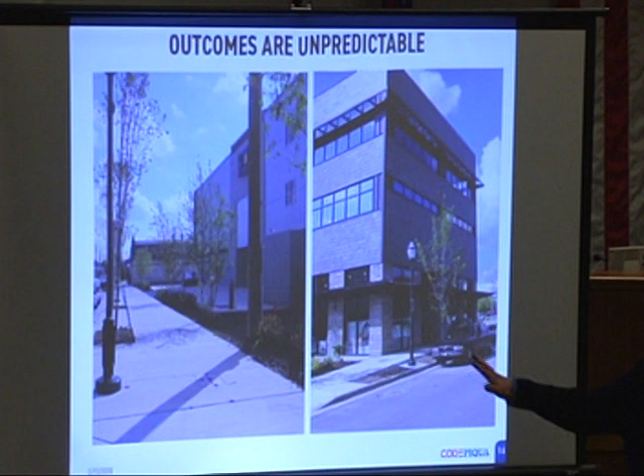If I was the guy who ran this, I'm not sure I'd be thrilled to have public storage as my next door neighbor. Now, admittedly, it's a pretty good looking public storage building, but the predictability of the system about use, also about quality of development, about the relationship of the person on the street to the building, all of those need to kind of get squared away and be consistent for people to feel comfortable and feel like you've got a great environment. So this new approach to zoning is, no matter what, much more visual.

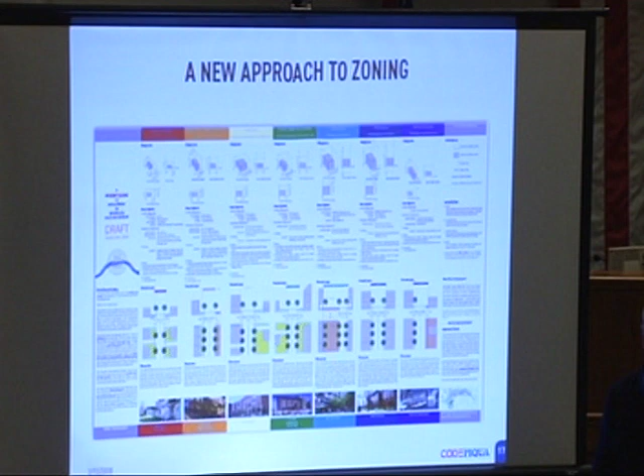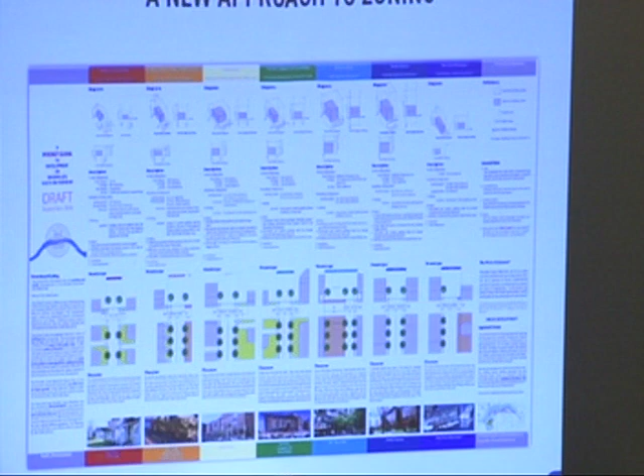This is some work from Knoxville. We are talking about combining ideas for the building on the private property and ideas for the street itself. And here we'll be bringing together the zoning and the subdivision regulations so we can talk about those things in tandem, the land use and the transportation.

This is an example of an old code. It's been a little bit updated with this little pasted in graphic that was built on the internet. But typically these codes now are visually oriented and graphic. This is one of our codes as an example from one of our client communities with an illustration of what the area might look like with lot standards, building placement standards, and height regulations, providing a much easier way to understand what the rules produce.

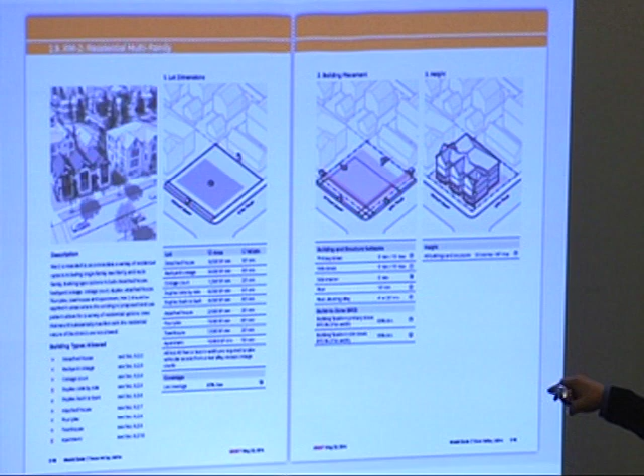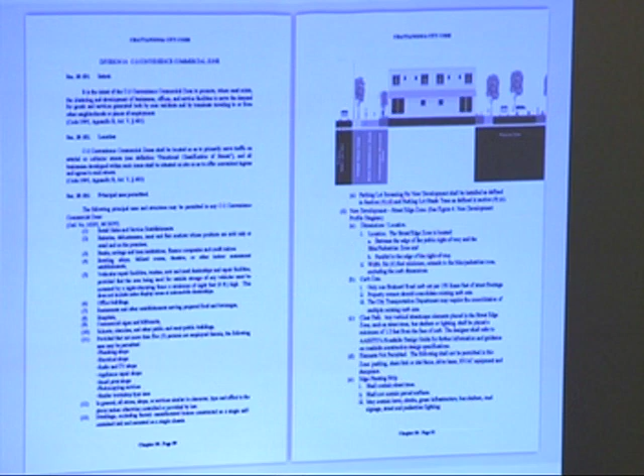The tables have the rules, but many people can't read those tables and imagine what that might be. So giving them this kind of a visual code. The other thing is when you write for the attorneys, as probably this code was originally written by the legal profession for the legal profession, then that's the kind of conversation you get instead of the design conversation that you wanted to have that happens when you have a visually oriented code.

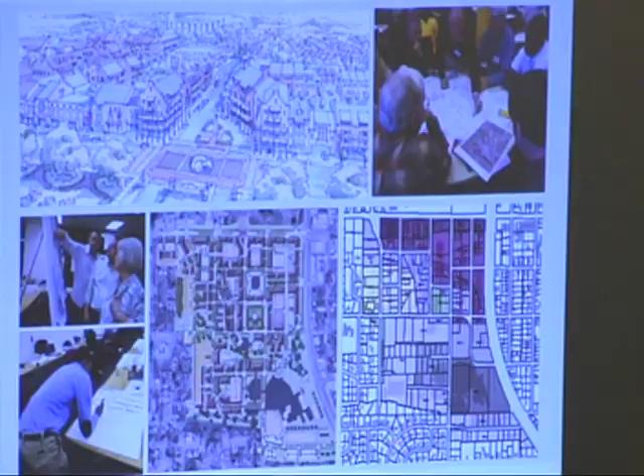Most times, these kinds of new codes focus on planning, and by that, I mean on plan implementation, taking ideas about parks, about other kinds of spaces, taking conversations with the community and turning those into regulatory approaches. That's what we're seeing in many of these newer kinds of codes. There is also a focus on this public realm concept.

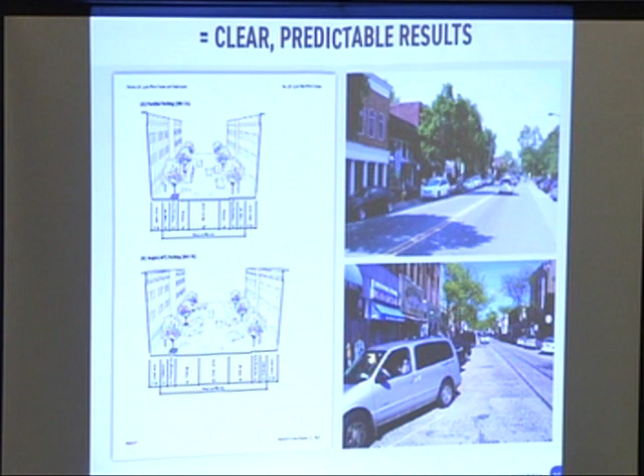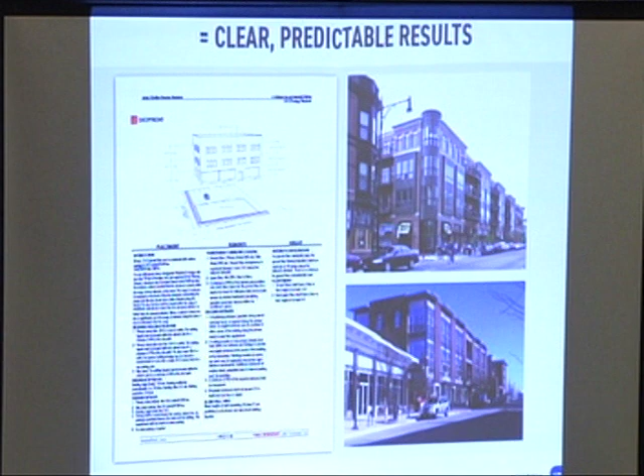The end result of all of this conversation is, if you can help us describe the thing we want, if this picture is representative of what I want, then the picture on the left is how I regulate that thing, so we all know what our outcomes will be. Clear, predictable results. Whether you like these buildings or their architecture or not, you can describe something and code for it. That's really what this project is about: the community helping us describe what they'd like to see in the future, and us helping you code for it.

So, just a little bit about our next steps. The next big step is something we call our Charrette Week. We'll be here with our full team, 6 or 8 of us, in addition to local staff. We might even get people from the Regional Planning Commission to come help support us. It's a multi-day collaborative design and planning workshop, one of the most efficient ways to get input from stakeholders without burning them out with meeting after meeting after meeting.

So this upcoming one might look a little like this. We'll show up Sunday night and begin taking our new team members on a tour through the community. We'll meet with the technical committee of city staff to check in one last time, and we'll run an open house workshop exercise on Monday night.

We'll get some new ideas, bring some ideas to the table, and combine as a group to see what needs to be changed about our thinking, what needs further investigation, more design, or more illustration, and have that conversation. The team will work over the next couple of days through Thursday late afternoon to design things and fill out the strategy for what we're going to do. In the meantime, like the last couple of days, we'll also touch base with our stakeholders again on a parallel track.

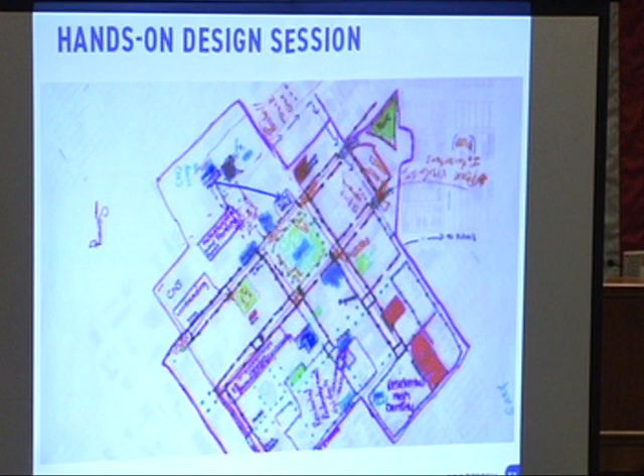The hands-on session is normally a citizen exercise at facilitated tables, with a member of our team facilitating the conversation. The conversations are often wide-ranging and may differ vastly from table to table, but that's all right - that has to do with the personalities involved and their own interests in the community. The most important thing is we get back a lot of information about the community, and especially when we do the report back at the end, we see, and the community sees, where we're in alignment. It almost doesn't matter who we've had at the various tables, there's going to be a lot of alignment - I pretty much guarantee it.

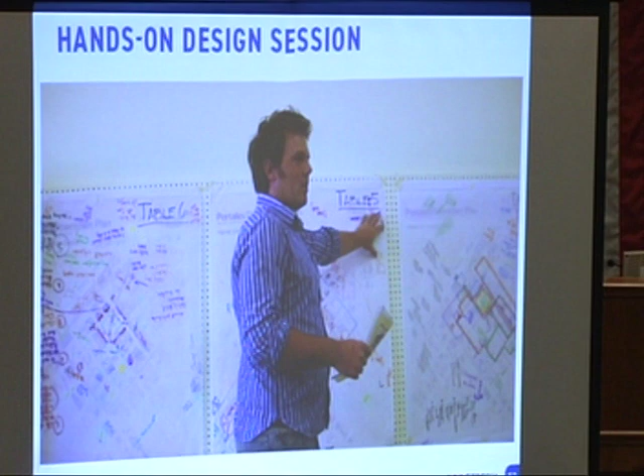I've run a number of these, and so far, knock wood, we've always seen a lot of commonality. While we may have some things we disagree on, we can focus on that commonality because, frankly, there's a lot of work to do in any community, and focusing on commonality gives us common ground we can work toward. That's what we're looking for as an outcome of this.

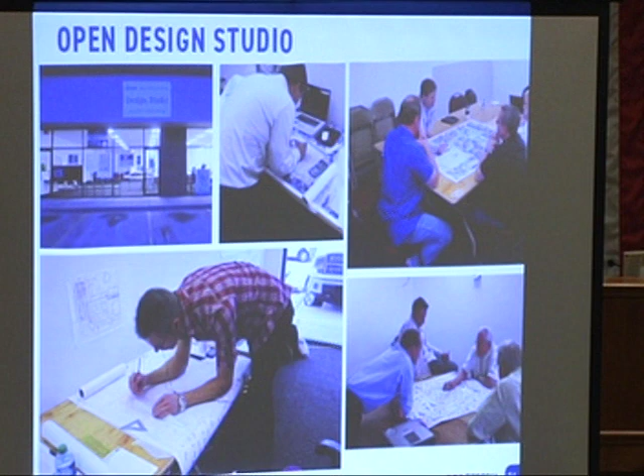We'll then begin with our Open Design Studio to actually work through some of the design challenges of specific sites and places, making sure we understand how things could happen in those locations.

We have this talent in town, so we often run lunch and learns during the lunch hour. We invite people to come over and listen to a conversation about the state of the art in thinking about transportation planning, or in regulating development, or perhaps in this community a discussion of historic preservation, or startup businesses - heaven knows what it might be. We'll have figured out by the time we get to this event what it can be. But really it's an opportunity to listen to, talk to, and engage with some of these experts who are in town.

There will then, on Thursday, be a closing presentation. We always call it a work-in-progress presentation because we're not done at that point - we are done with the charrette week, but there's much more work to be done. We should have a pretty strong idea of what we're going to propose for the framework of thinking about the transportation and the zoning, and how those two come together.